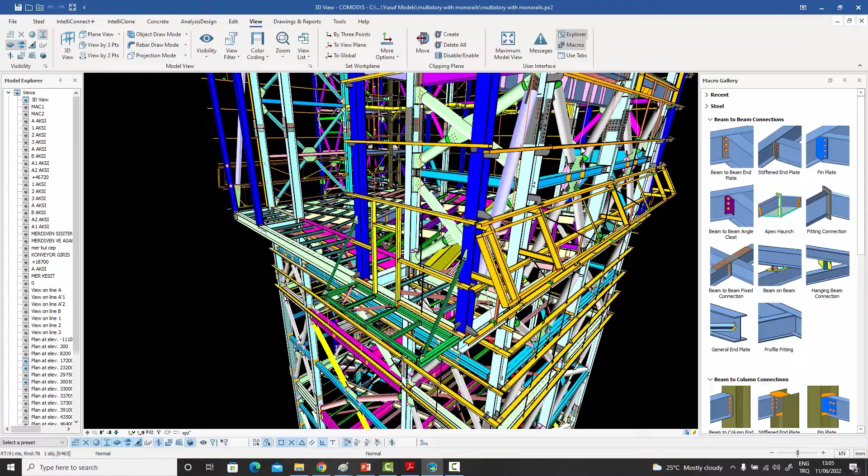In this video, I want to talk about general arrangement drawings.

In Comosys, or in 3D modeling programs in general, you have several different types of drawings. You have automatic drawings, like assembly drawings or part drawings. But you also have semi-automatic drawings, like general arrangement drawings. A general arrangement drawing basically tells you the location of the assemblies, and it's used during the erection of the structure.

To create these general arrangement drawings, after your model is complete and you're satisfied with it, and you want to create your plan views and section views in your drawings, you go to the Explorer on the left hand side, and at the bottom you have the drawing section. When you double click that, it takes you to the drawings manager side.

This is a different environment. The menus have all changed over here. There's an edit menu, a dimensioning menu, an annotation menu, a tables menu, a tools menu, etc. But right now we want to begin with how to create an empty drawing.

At the top of the left hand side, even this Explorer has changed. It's different from the Explorer on the modeling side. Over here you have the drawings manager at the top, and then you have modeling views, and over here you have all the views which you created on the modeling side. They're waiting for you on the drawing side as well. We have open drawings and model views, etc.

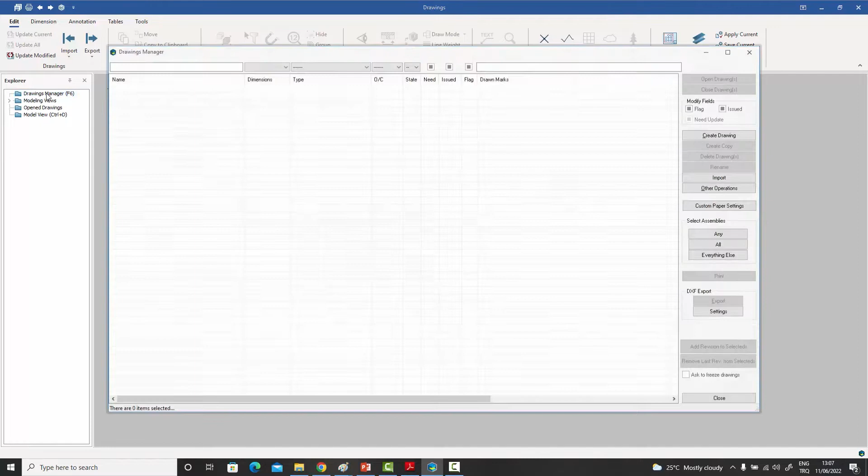But what we're going to be using primarily over here is the top option, which is drawings manager. If I double click that, this opens up, and I have this option of saying create a drawing. If I press that, it opens up the dialog box.

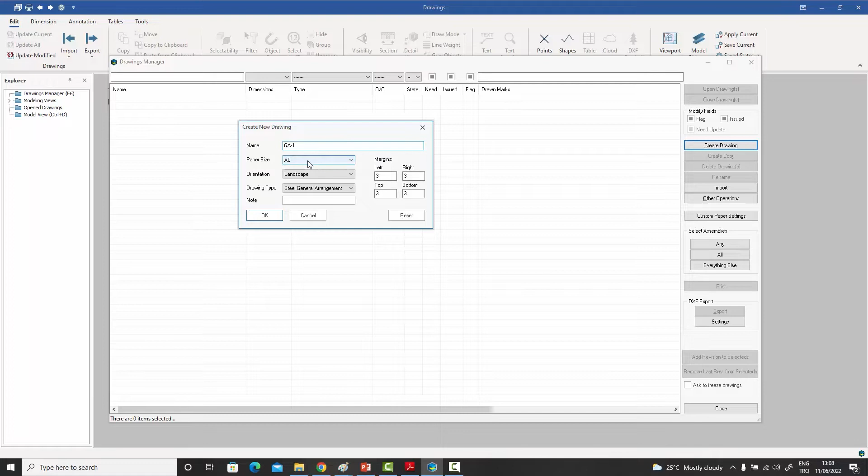I can give it a name, so let's say I call it GA1, general arrangement 1. You can choose a paper size, let's leave it at A0. You can choose an orientation, and you can give it a type - it can be a steel general arrangement drawing, a steel assembly drawing, single part - although these are created automatically, you can also create them manually. Multi-assemblies, grating drawings, there are different types. But let's say I want a steel general arrangement drawing, and these are the margins, and there can be some notes as well. So let's just press OK.

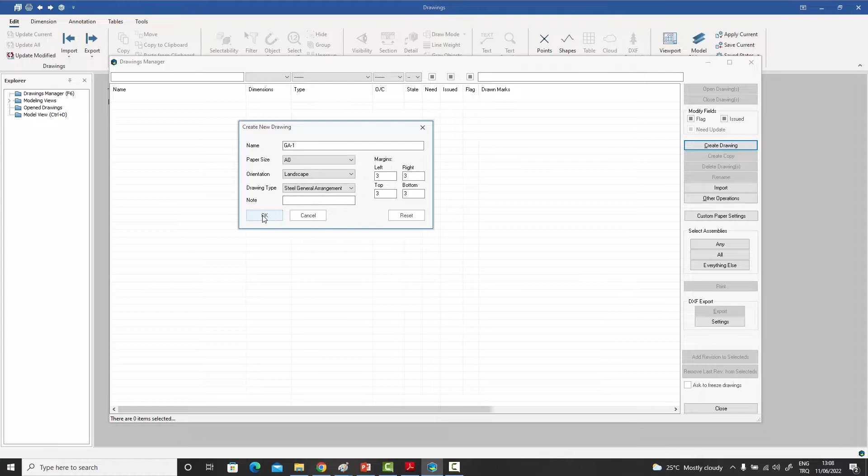When I do that, this drawing is created, and when I press this close button, it asks if I want to save the changes. Yes, I want to save this drawing immediately. If I zoom out a bit, you can see that this orange border is the outer border of the A0 drawing. Right now there's nothing in the drawing, and we'll talk about how we can import different stuff into this empty one.

Now, when we think of general arrangement drawings, what do we typically have in these drawings? The first thing we have are these viewports, these windows which are looking into the model. These are what we call viewports in Comosys. And inside this viewport, obviously, you have some steel or concrete, or a mixture of steel and concrete, or basically the structure, however you are looking at it.

Beyond that, there are dimensions, so the steel or concrete could be dimensioned - that's the second thing you have in these viewports. The third thing are these annotations, which are basically whatever fields you want to write on those members which you see on the screen. So there are three things: viewports, dimensions, and annotations. These are the primary big three of creating any general arrangement drawing.

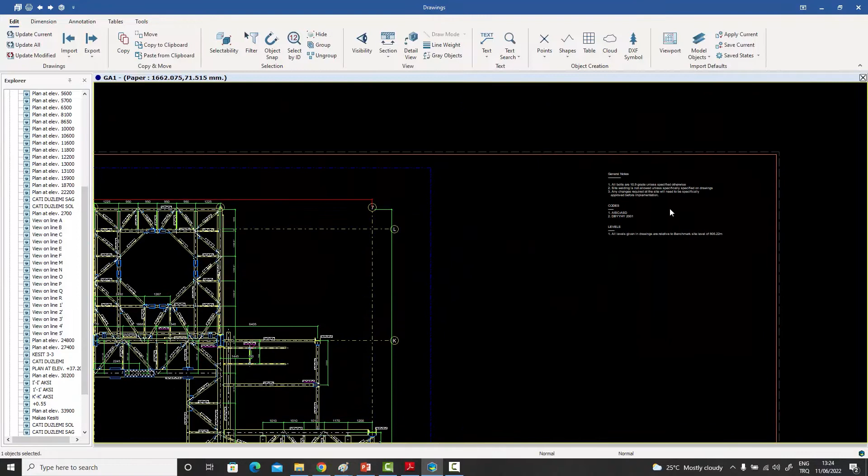And then obviously you have your title blocks, and you can have some notes if you want, and you can have other objects which you draw manually, or you can import a DXF file into it. But those I'm not really counting as my top priority right now.

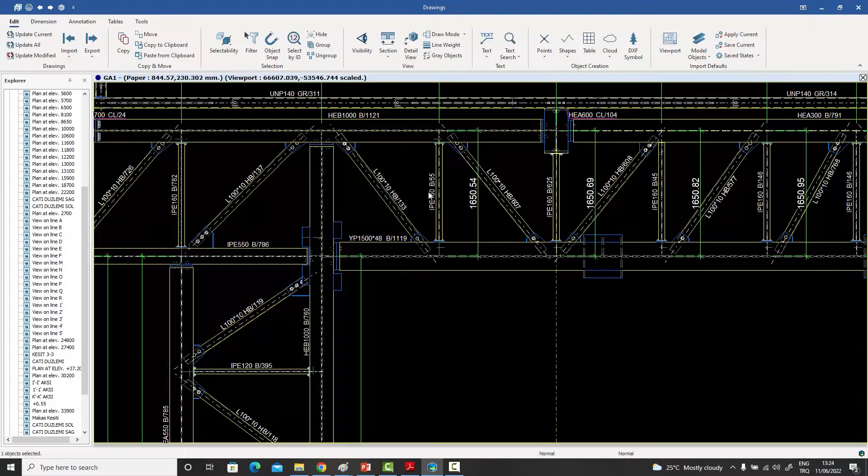95% of a GA drawing is basically the viewports, creating the dimensions, and creating these annotations. So that's what we will be talking about primarily in this little training session.

Now coming back to our empty drawing which we started off with, we're going to talk about how we put viewports inside this empty drawing. So we're on the drawing side. We came here, this is not the modeling side. The modeling side you can go back to by pressing this button over here. If you press that, you will go back to the modeling side. Then if you want to go back to the drawing side, you just need to double click on the drawings item over here again, and you get back to your drawings.

We've created this drawing, which we called GA1. If you remember, we gave it a size of A0, and we've got some basic fields in there. So this is an empty drawing right now, and the first thing we want to do is put a viewport inside it.

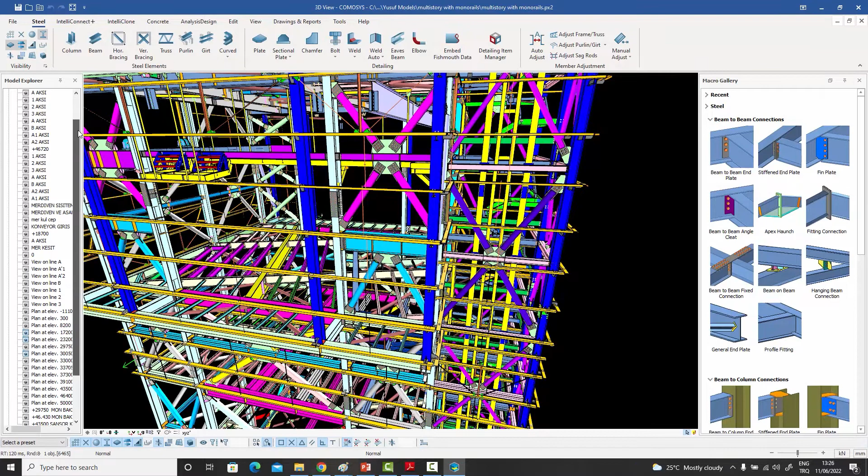Now if you remember, below this drawings manager, we have these modeling views, and over here you have all the views which you created in the model. These are basically the same - if I were to go back to the modeling side, you have these views over here. The same views which you have over there, you also have on the drawing side. So if I were to double click on the drawings one, the same views appear over here, and any one of them I can actually bring into my empty drawing.

So let's start off by saying I want to bring this plan at elevation 23,200 into my empty drawing. What I will do for that is go and click on this one, click on the plan at elevation 23,200, right click and say create a viewport. The moment I do so, a viewport will be created with whatever default settings you have, and we'll talk about those settings in a second.

So now that I have this viewport, what can I do with it? The first and most obvious thing, if I bring my mouse near the corners, you can see it changing the cursor. At the corners, I can resize it, so I can open it up a bit more if I wanted to. That's the first thing I can do with it.

The second thing I can do with it is if I go to the midpoints, I can actually move it around - I can move it around wherever I want inside the drawing. So these are the two basic things: you can move a viewport around, you can resize it.

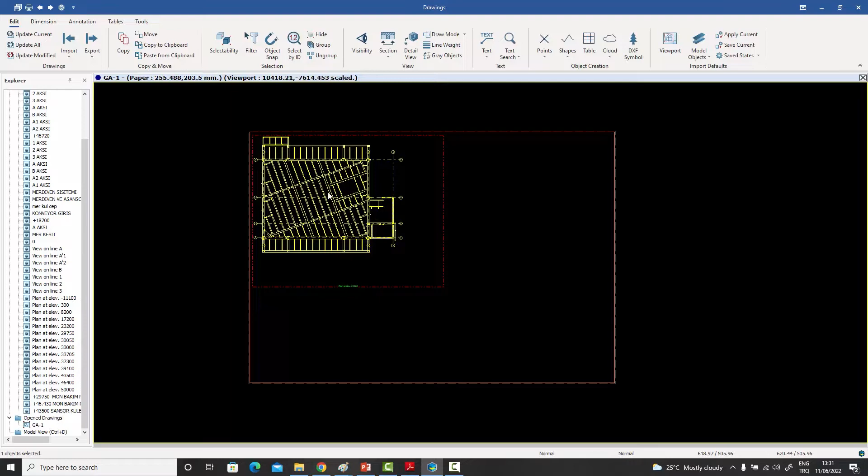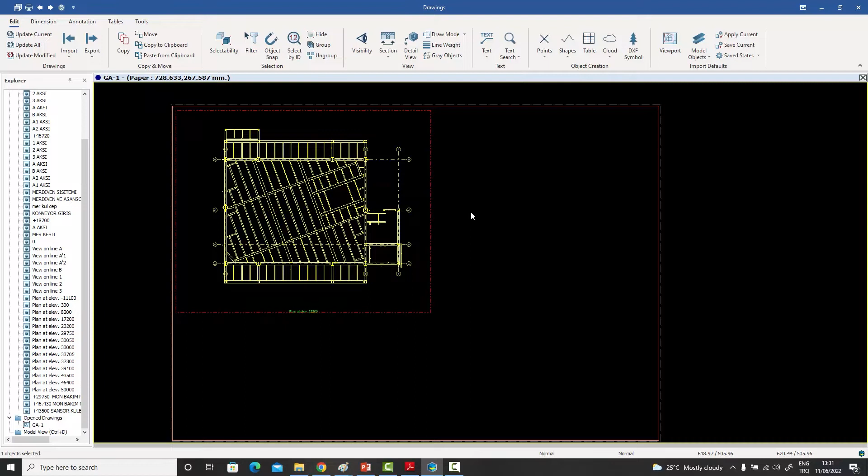Once you've resized it, you might want to relocate the stuff which is showing. Let's make it a bit bigger, and I want to relocate all of this into the center of this viewport. What you do for that is press the control key and press the middle mouse button, and you can move your structure around the viewport. That's a very convenient way, rather than going in and double clicking and entering a lot of dimensions in the X and Y directions - you basically move it exactly where you want, and you can just leave it like that. So this is a very convenient way of managing your viewport.

The next thing you can do with the viewport is double click anywhere inside the viewport, not on the members but where there's nothing, or you can double click this border as well. When you do that, the viewport property editor appears, and this has got several tab pages at the top which we'll go through because they're all important. On the general tab page, you can give the viewport a name, and by default it will automatically bring the name of the model view which you imported, but you can change that if you want - this is just the default you get.

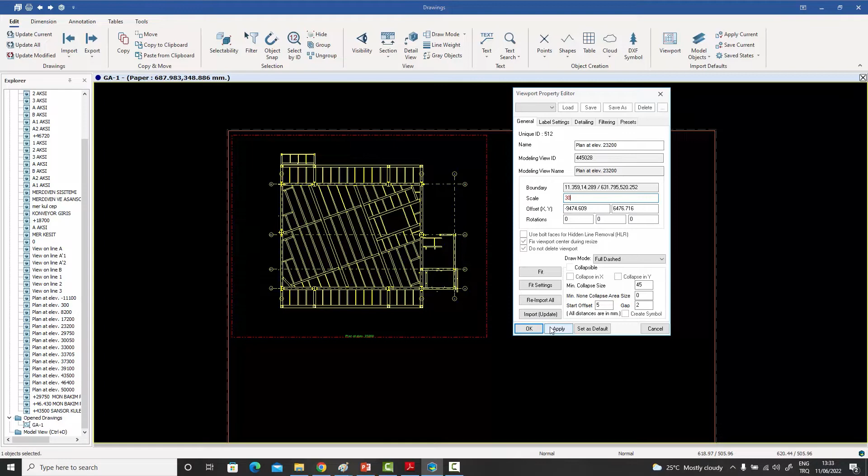The next thing of importance over here is the scale. So if I were to change this to say 30 and then press apply, the scale would be changed. The viewport would not be resized, but whatever is showing inside it would be rescaled. If I wanted to refit the viewport as well, I would just need to press this fit button, and when I do that it fits the boundaries of the viewport to fit the structure showing inside it.

We also have this option, which is very important: how do you want to actually draw this viewport? In Comosys, you have several options. You can draw it in line mode, where you basically see your structure in the form of lines. Sometimes when you're dealing with analysis related results, or you want to show joint numbers or profile numbers to corroborate with your analysis reports, you might want to display them as lines. So you have that option.

You can even go and change individual elements to lines as well, and I'll show that too. But there's a wireframe option, which is basically a non-hidden line view. If I were to zoom in, you can see - or maybe you can't see because this is already very nicely done - but if this was extending inside it, you would not see it as a hidden line view, you would see it as a non-hidden line view.

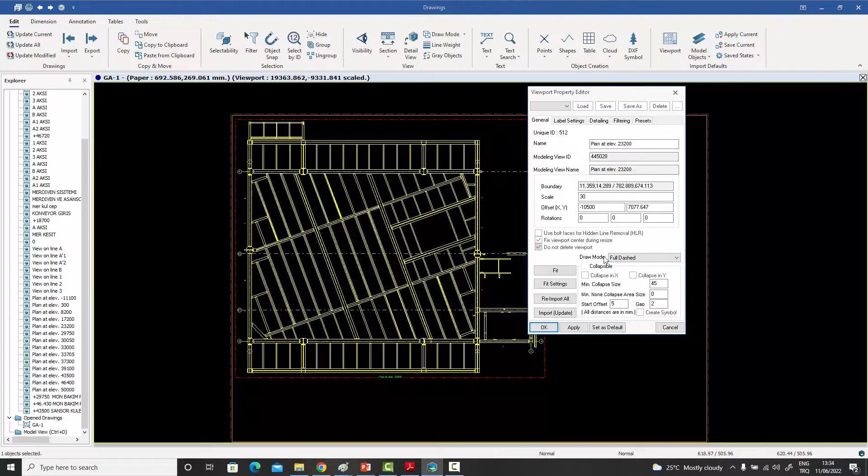But coming back, what you would normally use in a steel drawing would not be the wireframe one, you would use the full dashed. The hidden line means the hidden line check is done, and the full dashed one means that even if something is showing behind something, or its own hidden lines are behind something, they should also be shown. This is the one you would normally use in a steel general arrangement drawing, unless you're doing a 3D drawing. If you're doing a 3D view, you will use the normal hidden line view because you don't want too many hidden line things showing.

But the full dashed one is one you would normally do with plans and sections. So this is one I'm going to use, and you see that the moment I do that, my hidden lines are also shown. Now, let's see what else of importance we have over here.

There are some collapse related parameters. These are to do with assembly drawings. I'm not going to talk about them right now.

Okay, so I think these are the more important ones. If you want, you can change the rotation. So if it was a 3D view and you wanted to slightly modify the rotation, you could do that by modifying these three numbers over here. I think this is enough for the general tab for the moment.

The next thing I can do is move on to this label settings tab over here. This has to do with the label you see on the bottom of the viewport, which is basically the name you've given to the view. You can change it manually - it says plan at elevation 23,200.

You can place this label in different locations. If I were to choose this and say apply, it will go to the top. If I choose this one, it will go to the bottom right. I can put it in the bottom middle as well - basically all these six anchoring points.

Besides these anchoring points, I can give it a further offset. So if I were to give it an offset of say 25 millimeters, it would move it - these are millimeters in actual page size. I can give it an offset to the right, or an offset downward as well. So I've got some control over where I want to place that.

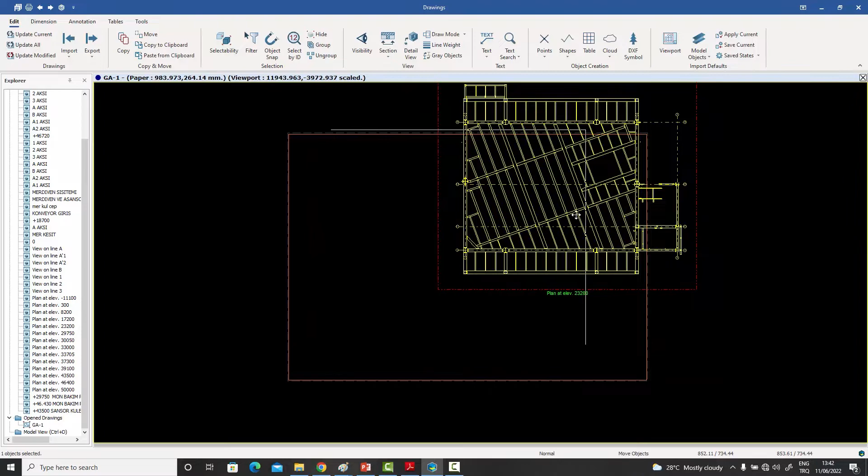Another thing I can do is locate it outside the viewport if I wanted to. If I press apply, it will be located outside the viewport, but it will still be attached to the viewport. So if I were to move the viewport around, the label will go with it - it's not that it gets detached. So I can use that option, locate it outside.

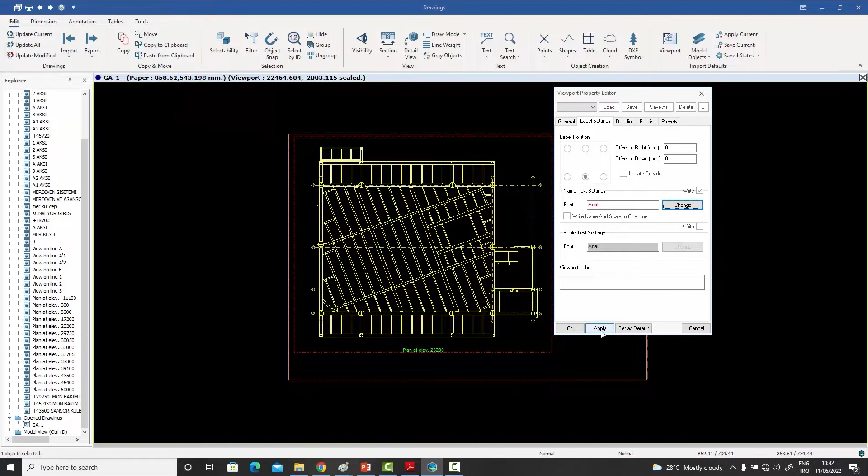I can obviously change the size of the font. If I were to bring it back in and say I want it bigger, let's say 25 millimeters high, I can change that. I can change the font, obviously, and I can give it a different label from over here. So these settings all have to do with this label which we have on our viewport.

The next tab is the detailing tab, but I'm going to go past that and go on to the filtering tab, which is more important. I'll come back to the detailing one.

In the filtering tab, you see these up-down limits. These are your classical up-down limits, which you also have on the modeling side for each view. You can change them, so I'm going to change them to 1 meter up and 1 meter down. The downside needs to be entered as minus. You also have minimum X and minimum Y, maximum X and maximum Y limits if you wanted to. If I press OK, you will see that some things will change.

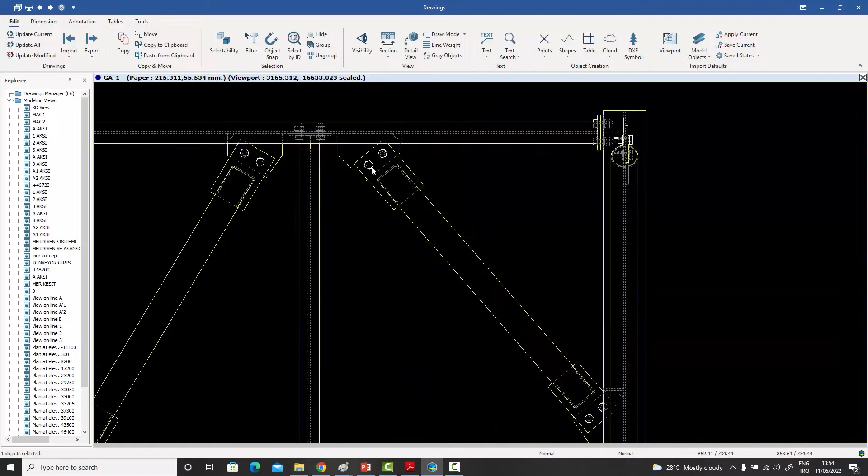There were certain elements in that floor which were not entering these up-down limits, and they've been added now. Also you see certain plates are showing which were not showing previously. So by modifying my up-down limits, I can get exactly the kind of depiction which I want, or include whichever members I want.

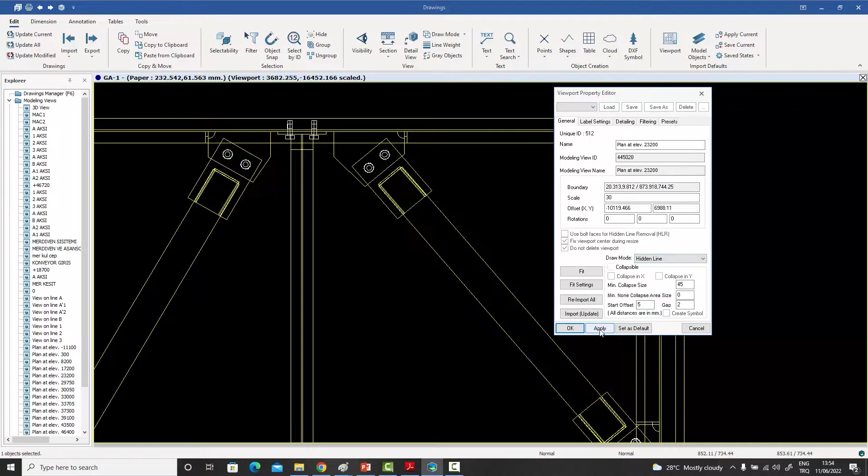Now, if you remember, I talked about this full dashed setting. This is the kind of result when you get the full dashed setting. If it was the wireframe setting, you would get a slightly different version with no hidden line mode. If it was just the hidden line one, we'd get something like this. And if it was the full dashed one, you'd get your proper steel GA type drawing.

So coming back to the topic at hand, let me double click on that one and go back to the filtering one. This plus 1000 minus 1000 is available to you, and you can modify these numbers according to your need.

Let's continue with the same filtering options. Over here we have this partial or full option, which tells the program whether you only want to include those elements which completely fall into these up-down or min x, min y, max x, max y limits, or also include those elements which partially lie within these limits.

For example, normally in a plan view you could see the columns. So if I were to close this and zoom in there, you can see the columns over there. Let me get a better column view. Here you can see the column, but this column is actually partially outside the limits of 1000 plus minus 1000.

And if you did not want to include this column in the view, you could go to the filtering and say full. If you did that, only those elements which completely lie inside the view would be shown, so this column would be filtered.

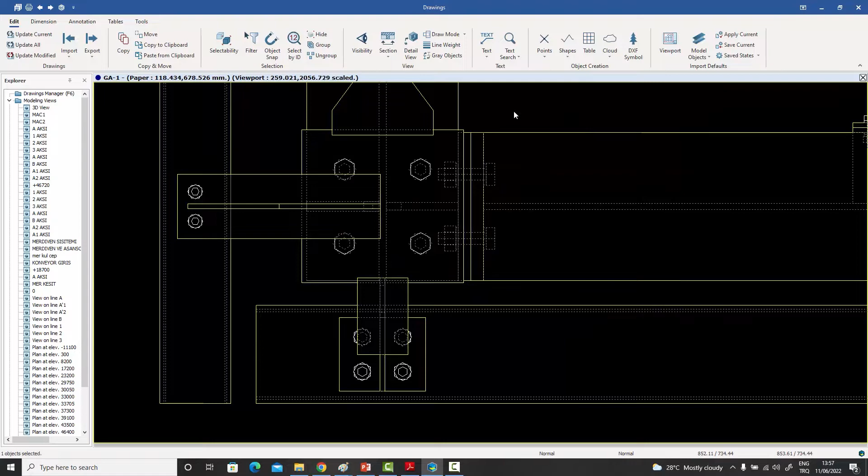Even the sag rod coming from the other direction, which is showing partially now, if I were to say OK, both of them will disappear from the screen, because now you have the full filtering option, in which only those elements completely lying in these up-down limits will be shown.

Normally you can leave it on as partial as well. Let's bring them back on, and we can continue with checking this option of filtering once again.

Now, so you understood these - this is partial, full, pretty easy to understand. And this is the next most important one, which is the actual filter settings for this view.

Within these up-down limits, you still have all your objects, but you can further filter which particular objects you want to show. If I press the filter settings and go to my filter, it has many options, from general to object types to groups to profiles to plates to solids to macros, rebars, analysis and design related filters, user defined attributes. So for example, I have object types.

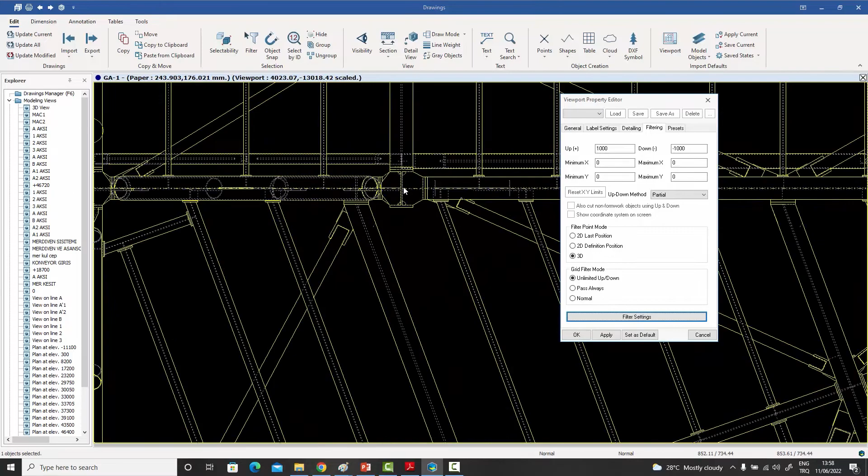I can say that I don't want to see the bolts. If I turn off the bolts and say okay, you can see that the bolts have disappeared from the screen - you no longer see the bolts. If I were to go in there and turn on the bolts again and say okay, now the bolts are visible in your view.

So these filtering options, if I were to go back in there, let's see what we have. The first control you have is the object types, in which you can choose whether you want to see the grid, the profiles, the dimensions, the joints, the construction lines, the construction circles. These are coming from the model, if you remember. Rebars, any cuts you might want to see.

You might be wondering, why would I want to see cuts? But in concrete drawings, you can actually annotate your cuts, and we'll talk about them later.

Do you want to import the welds, external drawing objects, super shells, density lines? So all the objects which basically exist in the modeling side, you can decide whether you want to include them in your drawing or not. And in steel drawings, obviously, you will not want to include super shells and stuff like that.

So you decide which objects you want. Then you have your grouping options, and you can create as many groups on the modeling side, and those groups can be filtered over here. You can choose which particular profiles you want. So you might want to say that I only want to see the beams and not the columns and the horizontal braces and the vertical braces.

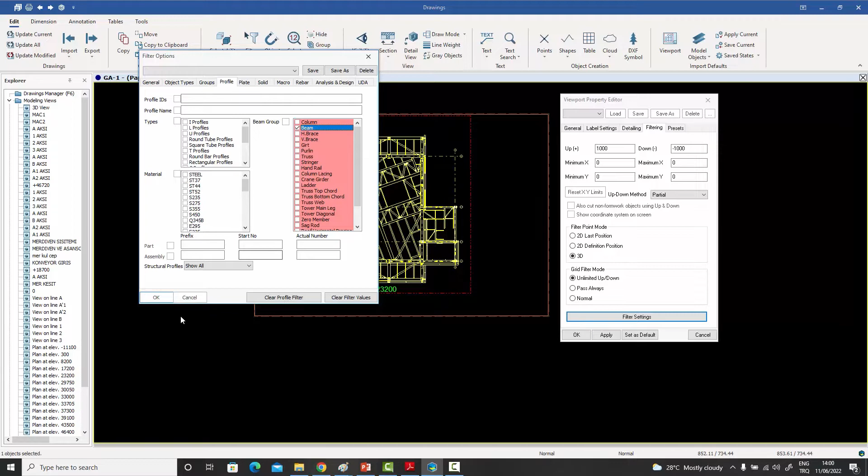And if you do that and press OK, then only the beams will be filtered out, and all the other columns and horizontal braces will be gone.

Similarly, you can say I want the beams and the horizontal braces, and this time they will be shown. Or what you can also do is you can say I want the beams and the horizontal. I don't want the beams and everything else besides those.

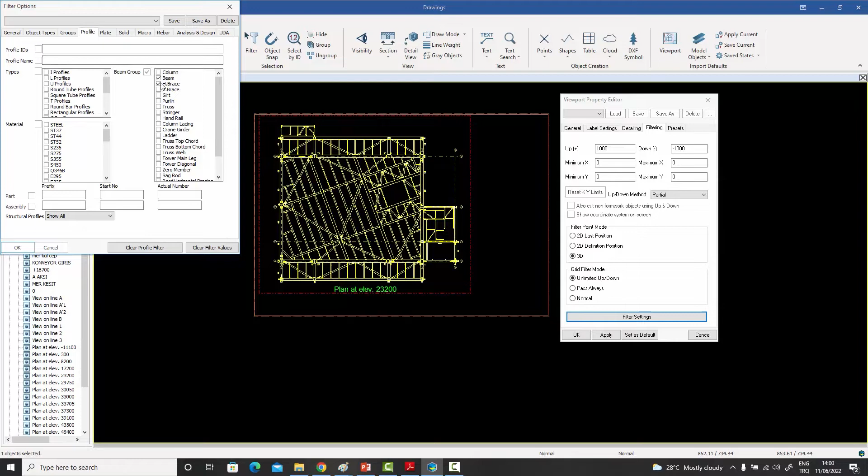So this is a not filter in a way. So if I say this would mean don't show me the beams and the horizontal braces. And if I were to press OK on that, basically most of the structure will disappear.

So these are very powerful filtering options for choosing by beam groups. You can choose by profile types. If you want I profiles, angles, channels, round tubes, square hollow sections, T profiles, whatever the profile types we have in Comosys, you can choose by that.

You can choose by material. You can choose by assembly numbers if you only wanted to see assemblies with certain prefixes or some actual assembly numbers. You can choose that. You can select particular profile IDs or profile names. So you can say I only want to see the IPE 300s, if you will.

This grouping option is unique because you can create arbitrary groups on the modeling side, and you can just select anything, and they may not be following any pattern, and you can put them in a group, and over here you might ask the program to filter that group out for you.

Let's bring them back on. And if I were to go back in and see, if we talked about the profiles, for the plates, you can talk about their usages and their types and their plate IDs. For the solids, you have a lot of different options. I don't want to go into the details of all these filtering options.

You can decide which particular macro you want to import as well. For rebars, you can have the types of rebars and their parent types, certain diameters you want to include or not include. So there are a lot of actions, a lot of filtering options which you have over here.

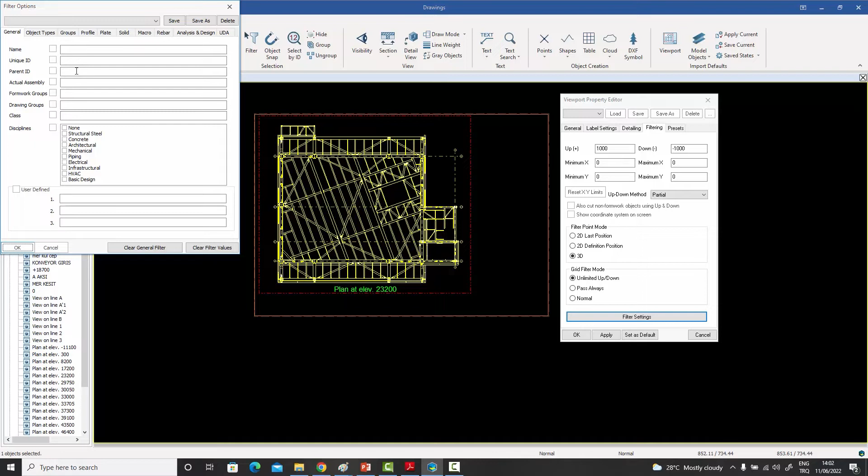In the general tab, you have your unique IDs which you can use. You can have actual assembly numbers generally over here. They could be applying to plates or profiles or anything else. You have formwork groups, you have classes, you have disciplines. So there's a lot of filtering options, and you can save these away with different names.

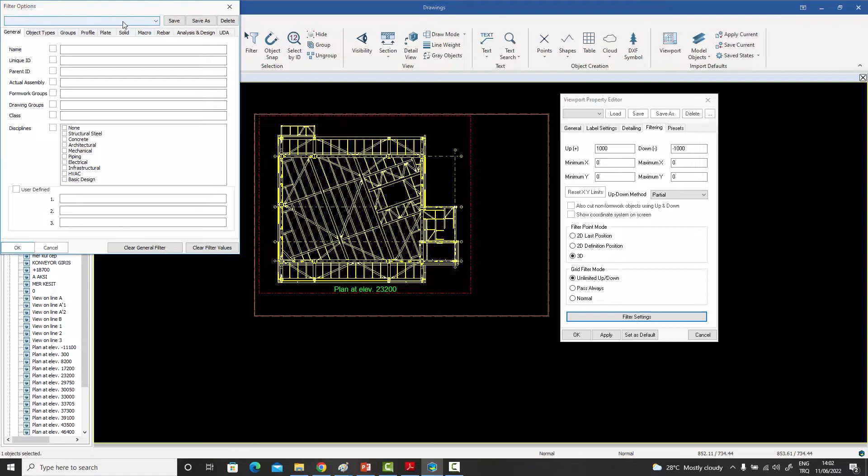What you can do in Comosys in general, like we've discussed elsewhere as well, is every dialog box you see in Comosys will have a preset. And you can save away these presets and recall them and just load them, and they will help you getting your filtering done very, very quickly.

Now let's continue with the detailing tab, which I had missed, and I'd gone on to the filtering tab. So in the detailing tab, we have certain things which are useful. Regarding the bolt imports, we can import the bolts as bolts only, or as holes only, or as all. So sometimes you don't want to show the bolts, but you still want to show the holes. So then you can change the style from here.

And then it has the option of certain drawing styles for the bolts. You can draw the bolts the default way, or as simple lines, etc.

Similarly, for the rebars, we have different import styles. We have the 3D fast, which is basically a faster algorithm for the 3D hidden lines, and also a 2D import, in which case the rebar will be imported as a 2D line, but the line will have the thickness of the diameter of the rebar. So it will look thick enough, as thick as the rebar diameter is, but in reality it will be a 2D import, which is what you normally do in your 2D rebar drawings.

Now, these are options I want to show elsewhere. These are to do with rebar staggering, because I don't have a rebar example over here. But this is something I want to show, which is the crop model objects option.

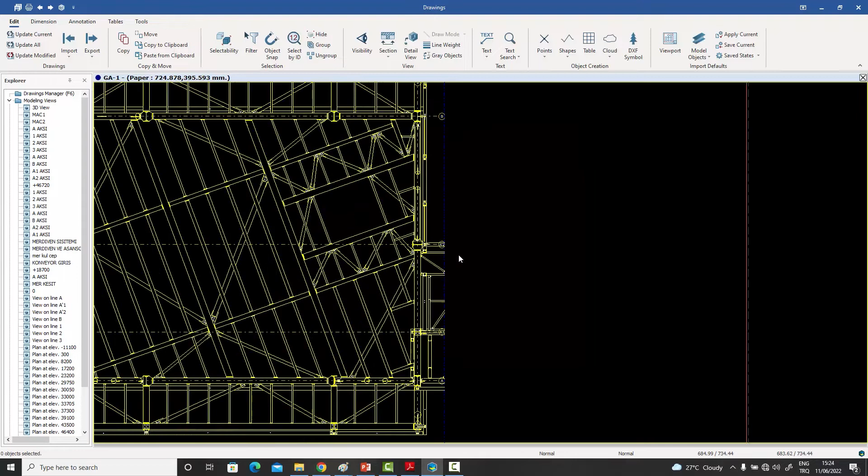For example, if I have this viewport over here and I want to pull this back in a bit so I don't see beyond this point, I can do that like this, and that's very easy. But what if I actually wanted to cut the members off? I don't want to pull the viewport back in. I want the viewport to be over there, but I don't want to show elements beyond this point. I want to crop while keeping the viewport.

The reason for that could be that maybe I want to write something over here and show something that is not a model object. So I don't want to use the option of squeezing the window limits inside. I want to keep them where they are, and yet I want a vertical cropping line on the right, or the top, or the left, or the right.

So what I can do is, if I double click and go to the detailing menu, and say crop model objects, and enter 200, for example, in millimeters, the program will crop the model while keeping the viewport where it is. So it's like creating a viewport within a viewport. And when I do that, you can see this gray viewport has been created within the blue viewport.

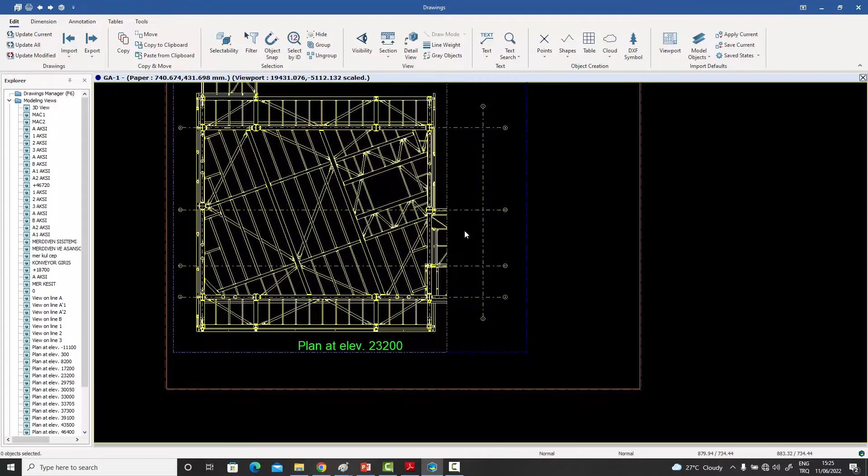And what that allows me now is to do certain things, like creating a zigzag line over here. So I can snap somewhere over here, go down somewhere over here, and do that, like that. Let me do it again, like that. Yeah, and I create this symbol, which is basically telling the program that I have cut it off from here.

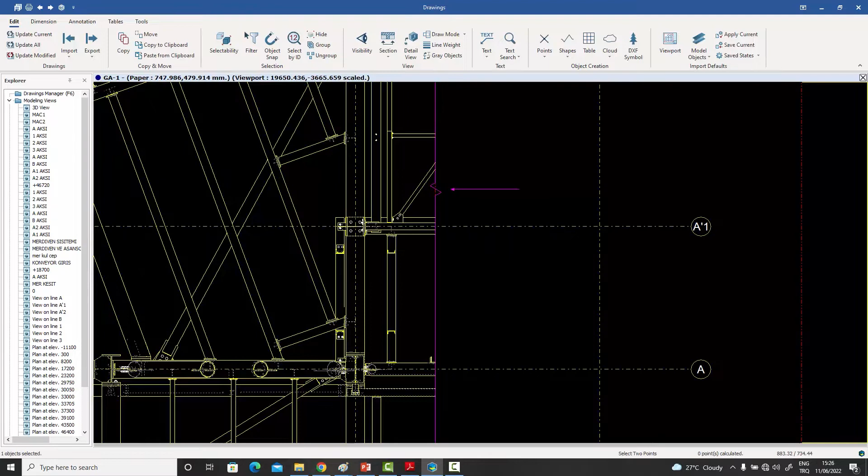After that, I can go in and create a text, maybe somewhere over here, a horizontal line, and write something like whatever. I can say equipment limits, for example, and I have this option.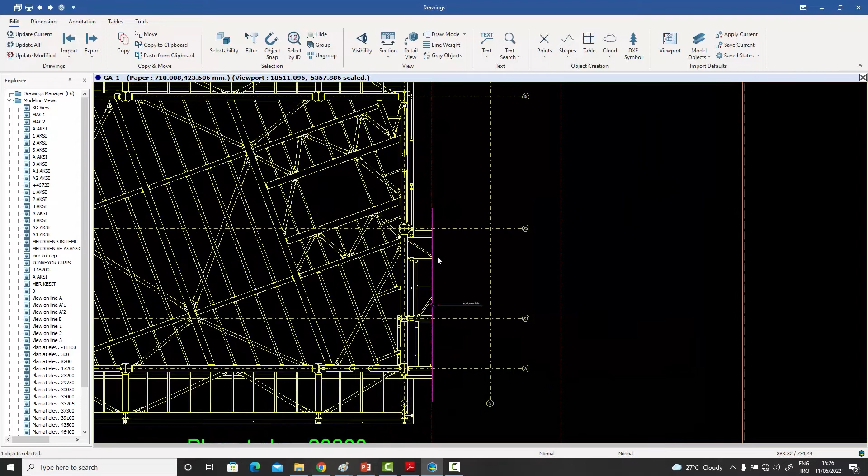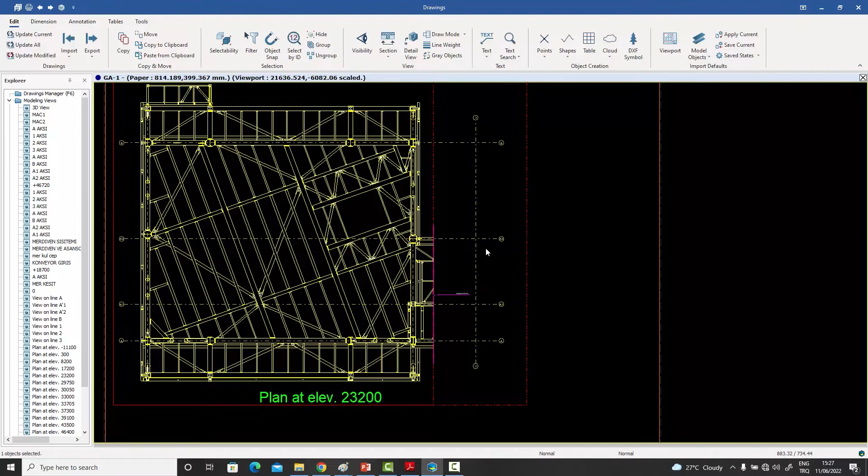So if I had pulled the viewport back in, that wouldn't have worked. I want the viewport to stay where it is and yet cut off the model objects at a certain point, and I can do that from the right side, from the bottom, from the left, or from the top, the moment I choose this cropping option. This is quite useful because in drawings, very often you want to draw or write something, but you don't want model elements showing, and since your viewport is bigger than that, they do show, and you don't have an option of cropping them off. So this is very useful, and you can use it wherever required.

Now that we are done with the viewports and the various tabs for the viewports, let's move on to what is inside the viewport, which is whatever objects we filter. If I go back to the filtering options and check the objects, we can import grids, profiles, joints, construction lines, construction circles. But more often than not, if you're dealing with steel general arrangement drawings, you'll be importing grids, profiles, plates, groups, and if it's concrete, you might be importing rebars as well, and sometimes solids too, depending on the need.

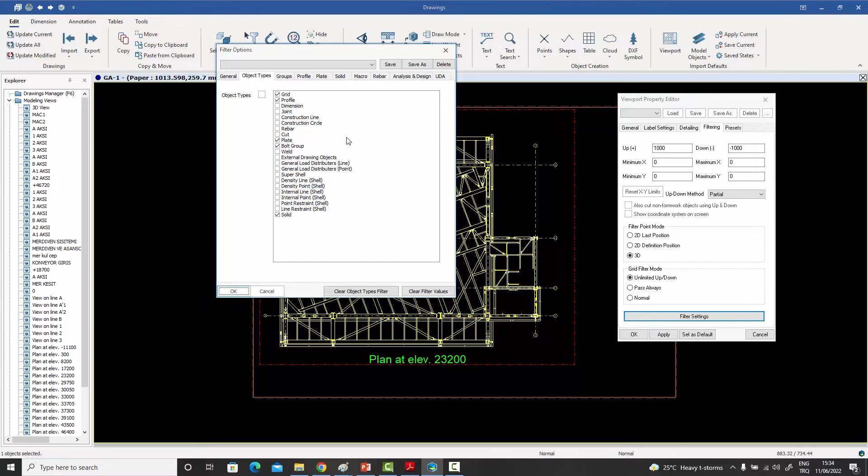So these are the objects which you'll be having in your viewport usually. For example, over here in our viewport we have frames. So these are the frames.

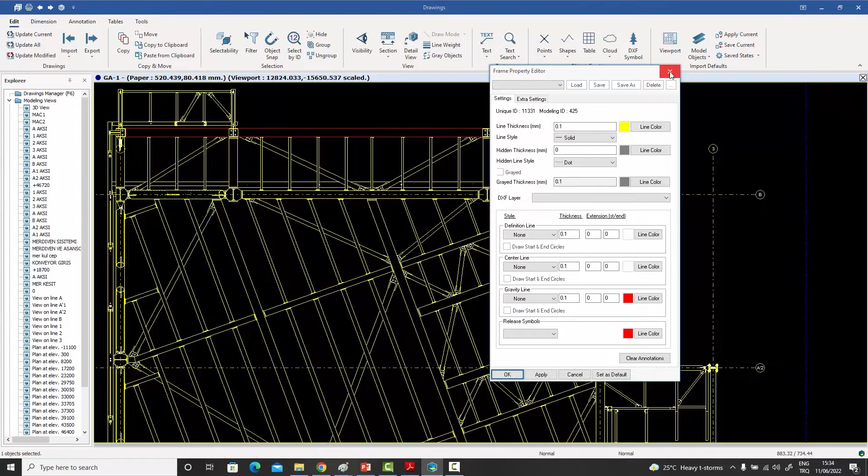If I double click on any one of the frames, we can see that each one has a property editor. So this is the frame property editor. If I zoom in and double click on this plate, there's a plate property editor, which is different from the frame property editor. Similarly, if I select these bolts and double click on one, there's a bolt property editor as well.

So the first thing you need to know is that when you have all these different objects, if I do a multiple selection and wanted to select only the frames, I couldn't do that because we have a mixture of objects in there. Let's say I wanted to modify a particular property of the frames - that would not be possible.

But with Comosys, since we have this on-the-fly filtering, if I just select like that and press enter, it immediately tells me what I have selected. So it's telling me that you've selected 352 profiles, 1,714 plates, so many bolts, and some drawing objects. Whatever is not selected is grayed out.

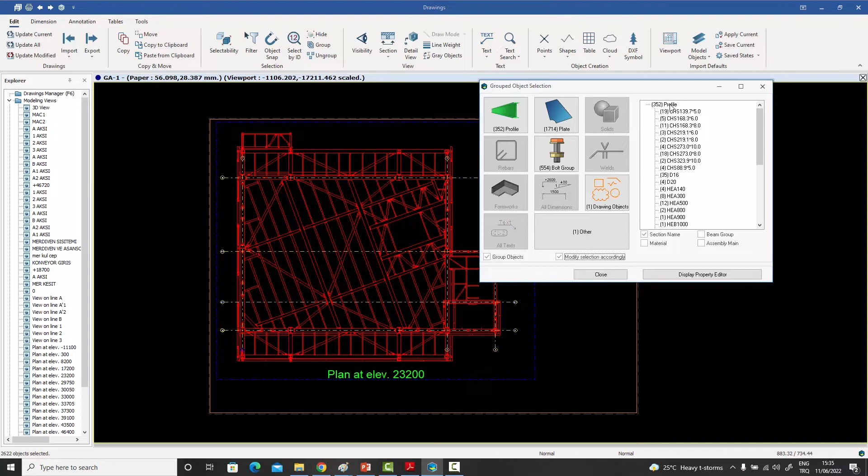So let's say I wanted to select only the frames. If I selected the profiles over here, then on the right hand side, all my profiles - if I just double clicked on this top line, I could select all the frames in one go. So let's do that. Let's double click on this one.

Now what it's done is it has removed the plates and the bolts from the selection. As you can see in the background, they have been removed, and only the frames are selected. It has also opened the property editor of the frame so that I can make any modifications. So let's try doing that.

The first thing we can talk about in this dialog box is the line thicknesses. As you can see, there are two line thicknesses - one is the normal line thickness, which you see over here, and one is the hidden line thickness. So every object in Comosys on the drawing side will have two line thicknesses, one for the normal line and one for the hidden line. And there will be a line style, and another line style for the hidden lines.

Normally in steel, for the normal lines you have a solid line style, with a line thickness of say 0.3 millimeters. For your hidden lines you might have 0.1 millimeters - actually even if you have 0 in there, it's still going to create a very, very thin line. But let's say we want a line thickness of 0.1 millimeters for the hidden lines, and for the hidden lines I want a line style of dash - this is the line style I want for hidden lines. My color can be yellow, for example, and for the hidden lines it's gray. If I apply that, those settings will be applied over there.

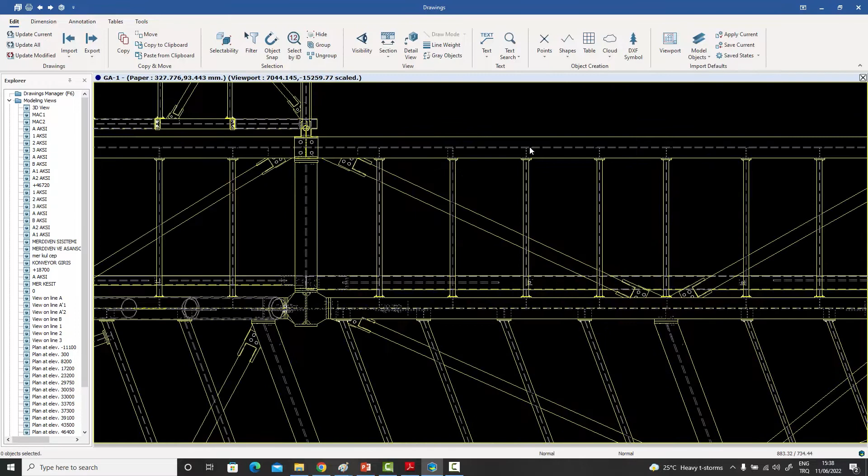Then you have things like definition line, center line, and gravity line, which you can turn on and off. First let's close this and zoom in and see that now we have these hidden lines - previously there were dots, but now we have them in the form of dashed lines for the frames. But if you see, the center lines are not being drawn.

So the center line of this I-beam, which is over here, is not being drawn. The center line of this one is not being drawn. So for that, let's go back in - let's select everything, press enter, press my frames, and double click on the profiles so that the property editor is open. If I go over there and say definition line, I've got the options of definition line, center line, and gravity line.

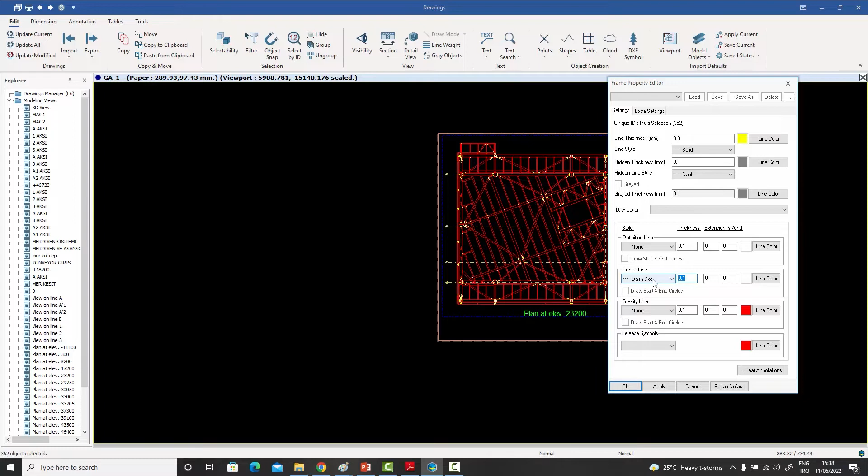So let's turn on the center line definition and call it a dotted line or dash dot line, for example, depending on what we want. This is an offset, which we can give it—let's give it an offset of say 3 millimeters, and see what it turns out to be. Press OK, and when I zoom back in, you can see the center line has been drawn.

It wasn't previously there. But what I don't like—if I double click on that, I want to extend. I think this is the one, yeah this is the extension, this is the thickness. Actually I did it wrong, let me put it back at 0.1.

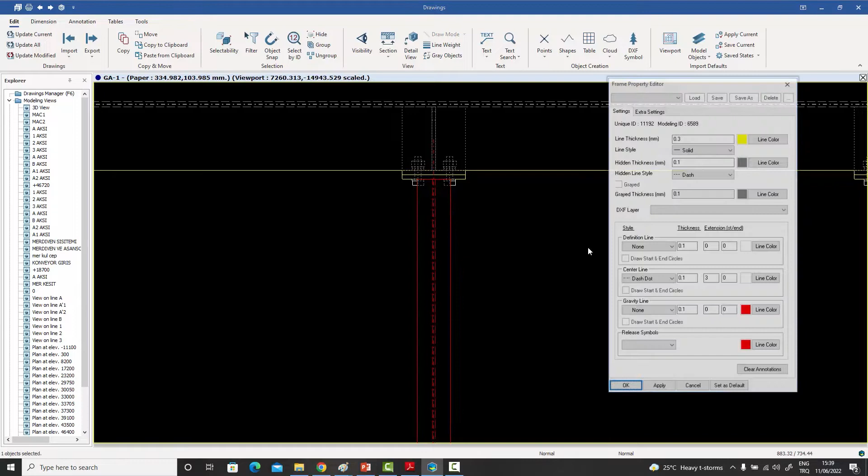Let's do an extension of 3 millimeters. Yes, so even 3 is not enough, so maybe I want about 6 millimeters—that's probably a better number. Yeah, that looks like a reasonable number in general.

So let me go back in there, select everything, do the on-the-fly filtering, go in there, convert this back to 0.1, which was a mistake, and convert all these into say 7 millimeters, and say OK.

And when I do that now, all my center lines have been extended, as you can see over there. And now you can even snap to the points, to the intersection points of these center lines.

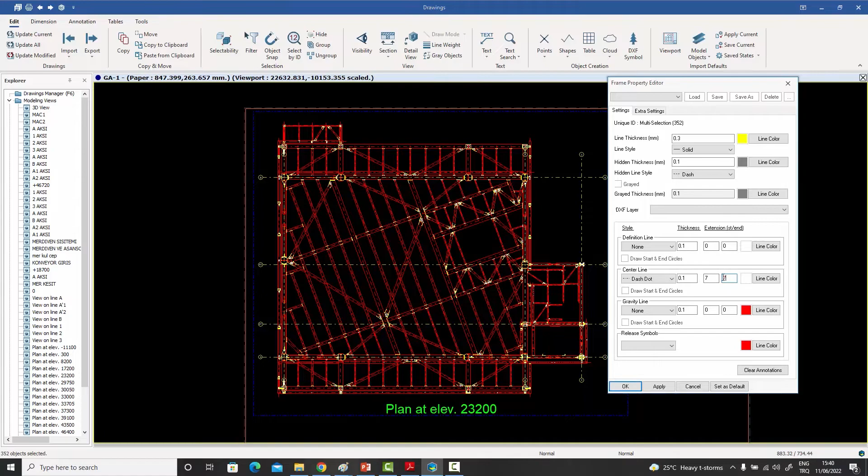Now obviously you will not only give the extension line to the start, but you'll also give it to the end, because you want the extension line to extend on both sides. When you do that, all the lines will be extended, as you can see over here. Every beam will have a start and an end extension, and you can now snap to these intersections as well.

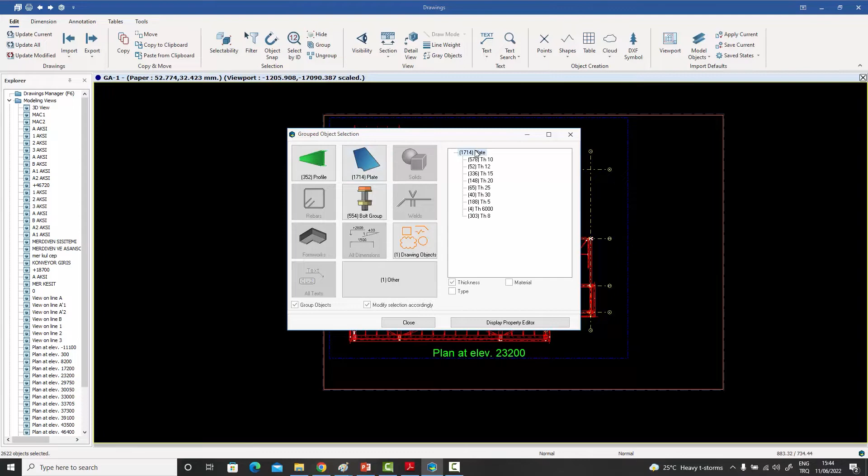You can do the same thing for the plates as well. If I press enter and select the plates only, I can go into my plate editor and give it a line thickness for the main and a line thickness for the hidden line. Line types, these need to be dashed. You can apply them and set them as default.

You want to choose a different color for the plates, for example—you might want them to be blue. Let's do that and set them as default. Also, you have these other options which you can easily use for your grouping. Now if I zoom in, you will see that the plates have turned—all plates have been turned blue.

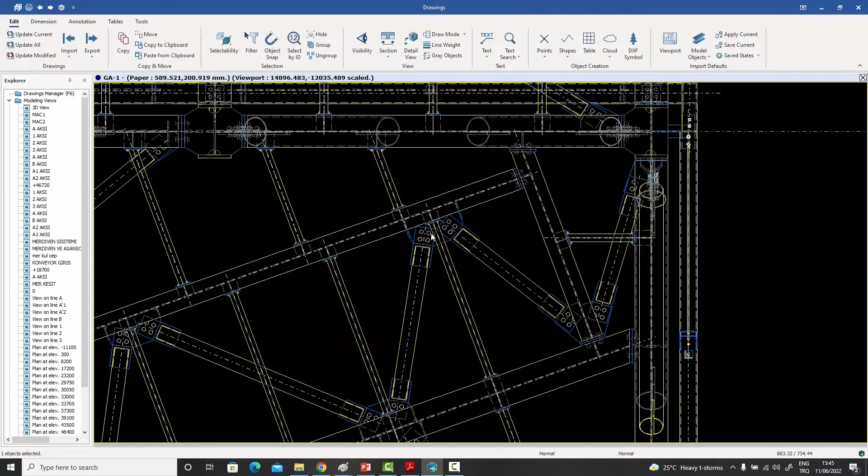You can do the same for the bolts as well. If I select everything, press enter, this time select the bolts—select all. I can select a particular diameter through on-the-fly filtering, but I can even choose a different color. Let's say green color for my bolts, for example. And when I zoom in, the bolts will be of that color.

So this is a very easy way of changing these parameters for whatever it is that you have imported into your viewport. If you really wanted, you could even select by beam groups, for example.

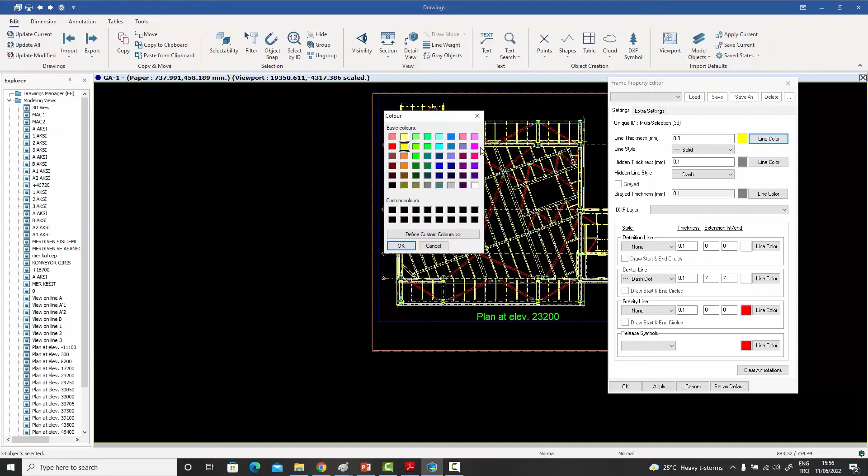So if I went into my profiles and grouped them according to the beam group, I could say I only want the horizontal braces to be selected, and now only the horizontal braces have been selected, as you can see. And maybe I can change their line color to something—maybe this color. Then I can see them in a different color. So you have those kinds of filtering options easily available.

What you can even do is change their draw styles if you wanted to. So let me go back in, press enter, go to the profiles, and once again select them according to the beam group—go to the horizontal braces. And this time what I can do is actually remove all their lines, main and dashed, completely, and only draw their center lines as a solid line, for example.

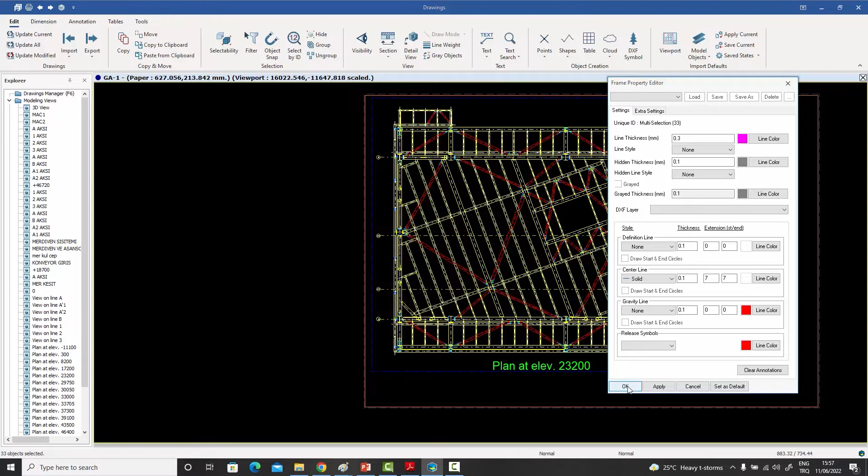In that case, I can decide to show the horizontal bracings only as lines, whereas everything else has been drawn properly according to the full profile section. So all these things are possible with this on-the-fly filtering and choosing different elements to be drawn differently.

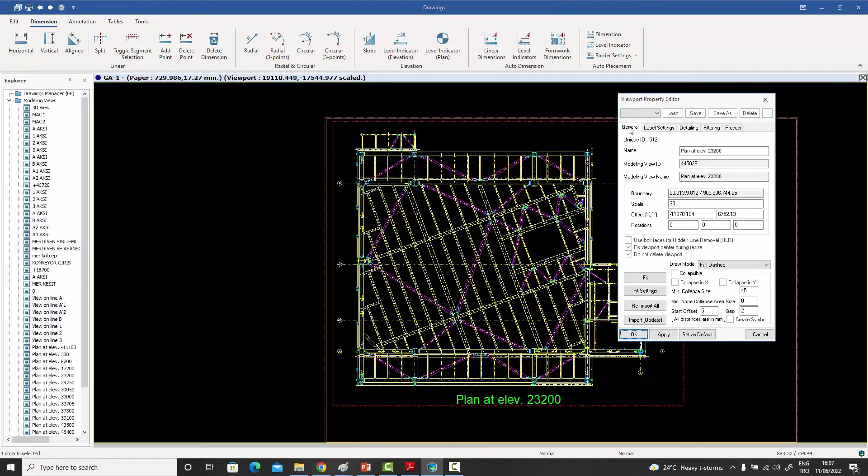Now we've basically covered all the aspects of importing a viewport from the model into the drawing, and then changing the various properties of the viewport by going through all these settings - the label settings, detailing settings, filtering settings, general settings, etc. We've also talked about changing individual parameters of the objects imported into that viewport by changing their line thicknesses, definition lines, colors, etc. All of these are useful and required if you want to create a proper drawing.

Now, once we are happy with our viewports, like we discussed in the beginning, that in a drawing typically the most important things you do are creating viewports, adding dimensions, and then adding annotations. So we've talked about creating viewports in some detail. Now let's talk about creating dimensions.

In the dimensions tab, if you go to the dimensions menu, you've got lots of options for dimensioning. Most of them are for manual dimensioning, and some have to do with automatic dimensioning as well. Starting from the left, we have horizontal dimensions, vertical dimensions, and aligned dimensions. For example, all the dimensions over here will be horizontal, all the dimensions along this line will be vertical, and if we were to dimension this beam along this beam, that would be an aligned dimension.

So what you do is click on the horizontal one, and it asks for points. Let's zoom in and select this point, and the second one can be this point, and then it asks for a place where you want the dimension to be released. Wherever you right click, the dimension will be created.

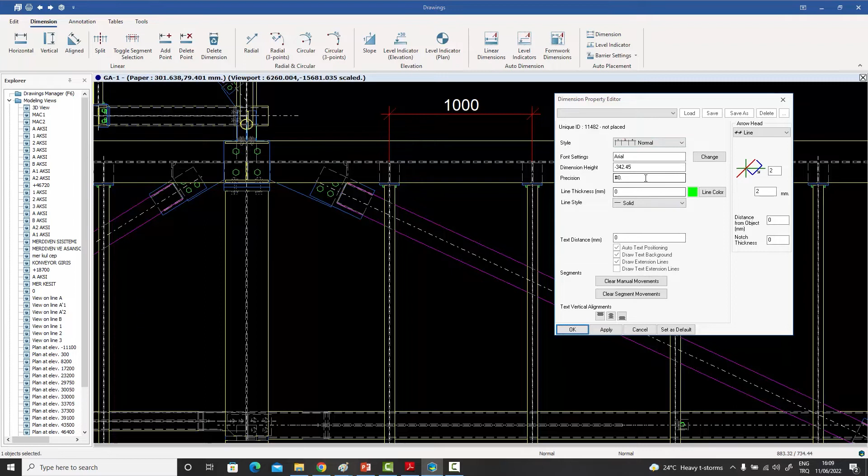If I double click on this one, I can open the dimension property editor, and I can see it has certain options which we can talk about. We have certain options for the arrowhead - different styles for the arrowhead - and we'll come back to this.

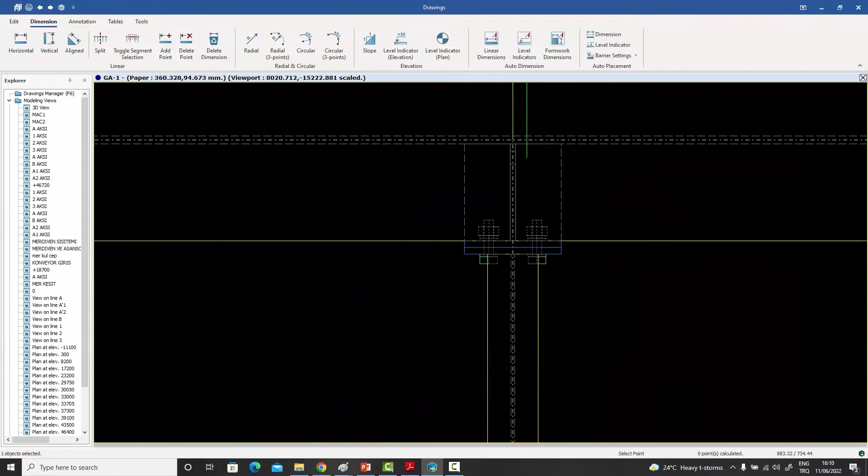But what I want to show you right now is if I right click this and say add point, it can continue the dimension. So if I zoom in and add this point as well, I can pan while doing that and add this point. I can pan, zoom in, and select this one, pan again, zoom in, and select this one. Whenever I right click I'll get out of the command.

As I do that, my dimensions are being created. It's very easy - you select an option, select the points you want to snap to, and whenever you're done, you just right click and finish. If you want to add points, you select the dimension and say add point or delete point.

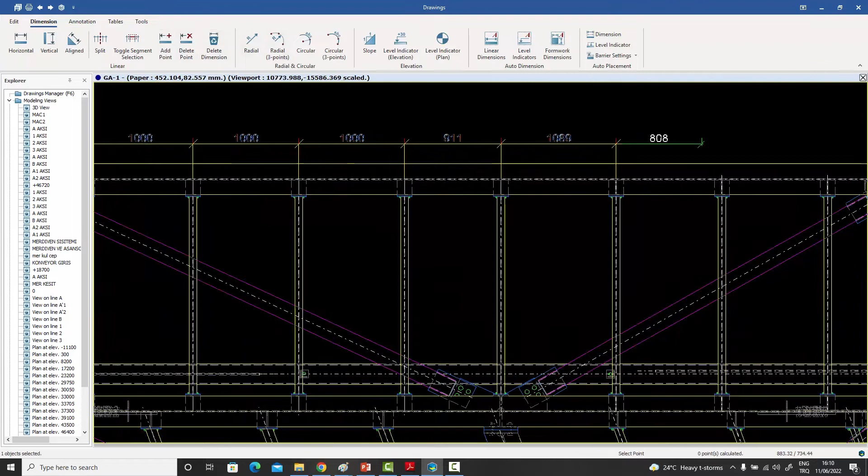These options are also available over here - add point and delete point. If you select this one and press add point, you can go in and select this one and right click, and you would have added your point. Similarly, for the delete point option, if I choose it, you can click anywhere on these lines and that particular dimension will be removed from the list.

That's very easy. If I double click on the dimension again, the options are there for different styles - this is the normal style. If I do the absolute one, it will start giving absolute dimensions rather than relative ones. So it's 1000, 2000, 3000. This one is 5000, 6000. Similarly, I can give absolute and relative together if I want.

In that case, it will be 1000, this will be the total. Another 1000, total is 2000. Another 1000, total is 3000, etc. So those options are available. You have control over your accuracy, so you can increase or decrease the precision with which you want your dimensions to be shown. Now, what other options?

Like I said, you have options of various line styles - you can have a line, a thick line, arrowheads, filled arrows, and you have control over their angle. So you can maybe reduce the angle of the arrows over there. You have control over the size of those arrowheads, etc.

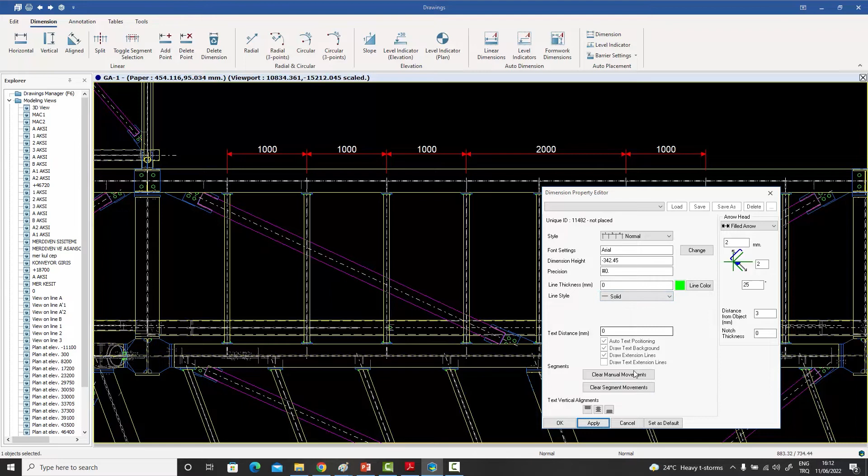So what I want to show you is this: normally if I select this dimension, I can move it up and down, and the whole dimension moves together.

But if I press this toggle segment option, I can actually select individual elements and move this one up separately, at a different location, and move another one up like that. Once I remove the toggle segment selection, the whole dimension is still together.

I can still move them up and down together like that, but by using the toggle option, I've managed to separate parts of them, because sometimes you have certain things clashing along that line, and you don't want to move the entire line up, only a particular one.

So you can use this toggle segment option, and if you wanted to bring it back to the original, all you need to do is double click on that, say clear your segment movements, say okay, and all your segment movements will be reset.

Now the vertical dimensions are going to be done the same way as the horizontal ones. Let me quickly do one aligned one over here. Zoom in, snap to this point, snap to this point, right click and create my dimension. Right click that, add a point to it, zoom in there, add a point, add another point. Basically, the idea is that you just keep selecting points, and depending on which type you've chosen, whether horizontal, vertical, or aligned, you'll get results according to that.

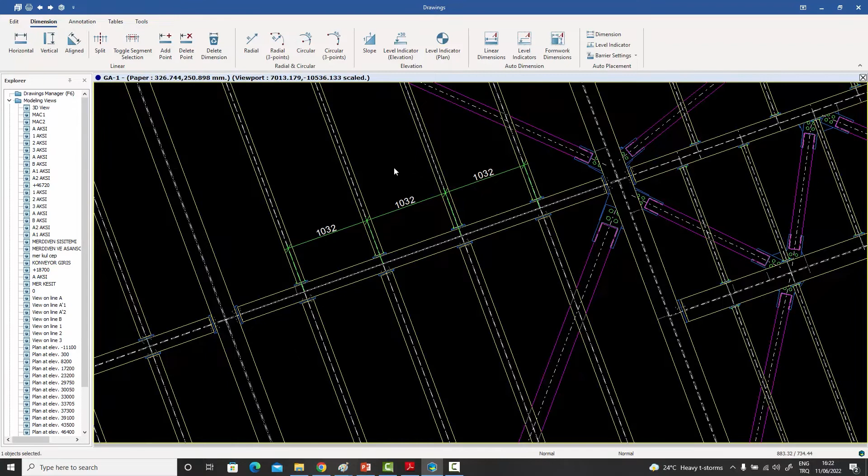I'm not going to go through every one of these commands, they're pretty self-evident, but you can create slopes. For example, if I wanted a slope dimension, this would more often be used in concrete, but let's say I wanted to give the slope of this line, I could just select two points on it and a slope dimension would be created.

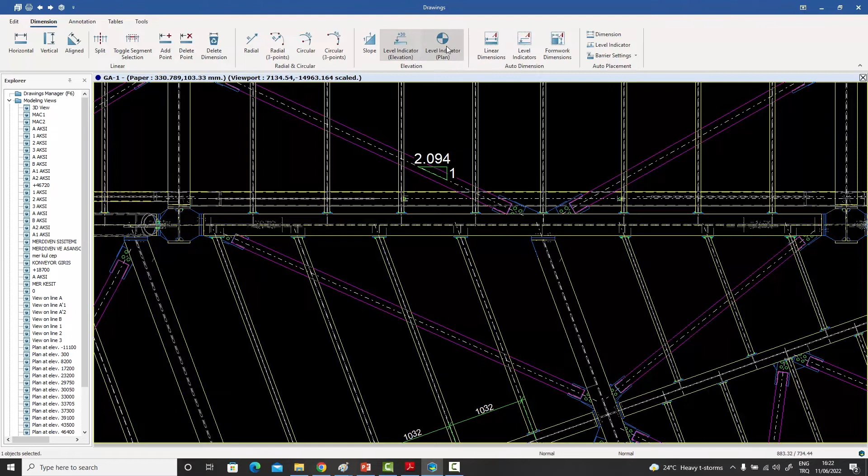If I wanted to give a level indicator, this being a plan view, that's more appropriate. All you need to do is select a particular point, and it'll pick up the level from the model. After that, you can place it anywhere on the drawing, and you'll have created your level indicator for this plan view.

Now in this video I'm trying to give training for manually creating dimensions, but we've discussed elsewhere that for steel GA drawings we have the option of creating dimensions automatically as well. So let me briefly go over that.

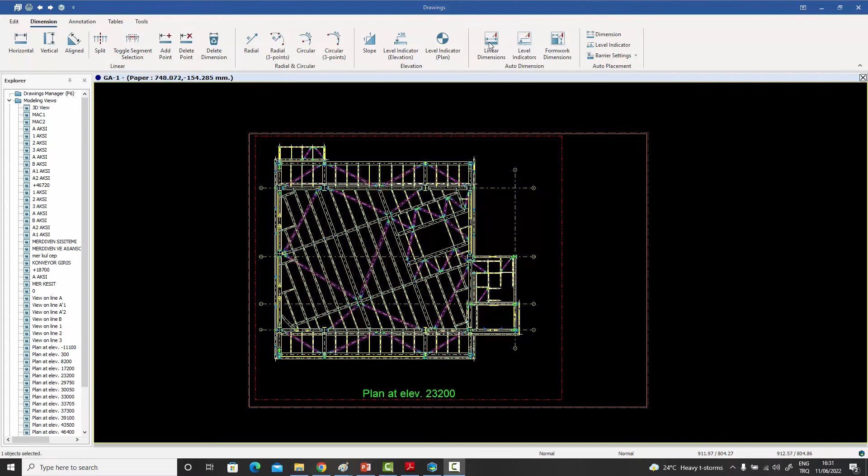This button over here works for both steel GA dimensioning as well as for concrete. All you need to do is first press the shift key and press the button so you can change some of the parameters. Under the general section, you have these two options: creating the steel work GA dimensions or creating the formwork dimensions. You can create both at the same time as well.

If this is selected, and as far as the steel GA arrangement options, you can turn certain things on and off. By default, any inclined members are turned off because that creates clutter more than anything else. So it will do the main dimensioning for elements lying in the XY plane of the drawing. All we need to do is select the viewport and press this button, and your main dimensions, as you can see on screen, will be created for you.

Let's go over here. So all the time you'd waste by selecting and zooming in and selecting the points again and again, that will be done for you.

Now the elements which are not in the plane, like the inclined ones, will not be dimensioned. So those you will need to go in and dimension yourself. So this is a very quick way of doing your steel dimensioning.

Now that we've finished dimensioning your general arrangement drawings, let's move on to annotating the general arrangement drawings. Annotation is a broad topic, and the first thing I want to say is that all different kinds of objects can be annotated. So on the left side under the annotation menu, you have profiles, plates, cuts, joints, bolts, welds, and generic solids. And over here we have the rebars. All these types of objects can be annotated.

By annotation, we basically mean showing any field related to that object on the drawing.

So let's go into the profiles one. You have these little arrows beneath every one of them, and if I click on them, you see there are several options. One is to directly annotate using the current settings, or you can first modify the settings and then use the annotate command. And then there's a barrier settings, which more often than not you will not touch, but I will explain that as well. So if I go into my settings for the annotation of profiles and click on that, this dialog box opens, and this is for profiles.

And if you see on the screen, you've got all these fields to play with. So you can annotate the ID, for example. Let me just put these back in to start from scratch. So you can put your ID, and what you can do is just drag it into this box, drag it back, drag it to the left side, or drag it to the middle or the bottom. But more often than not, you will just drag it into the middle because it's going to find its place anyway. So you can drag the ID if you wanted to annotate the IDs of the elements.

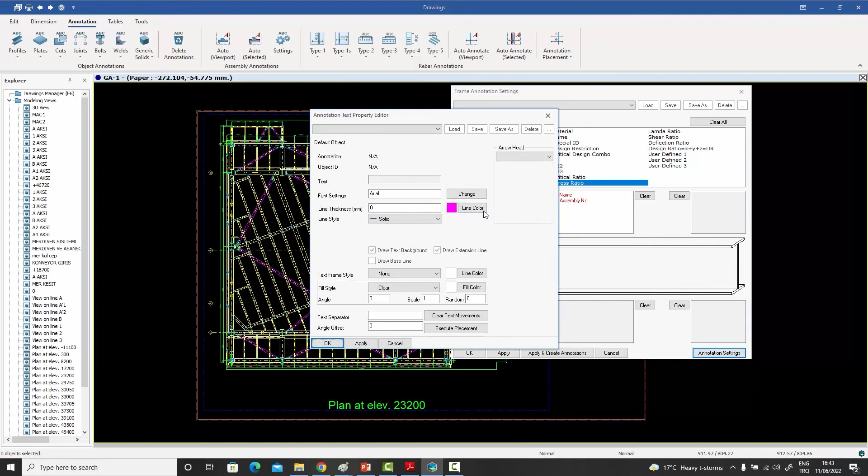Basically, you can access the fields. So in this case, what I'm going to do is put in the profile name and the actual assembly number. Then, if you went into these annotation settings, you have control over the font styles, the size of the fonts, and the colors and so on — you can modify those from there. Let's just keep them whatever the default is right now. Say apply. So currently I've chosen the profile name and the actual assembly number in my settings.

Once I'm okay with the settings, all I need to do is select any member and say, okay, annotate this profile. And when I do that, immediately it annotates the profile section name as well as the actual assembly number.

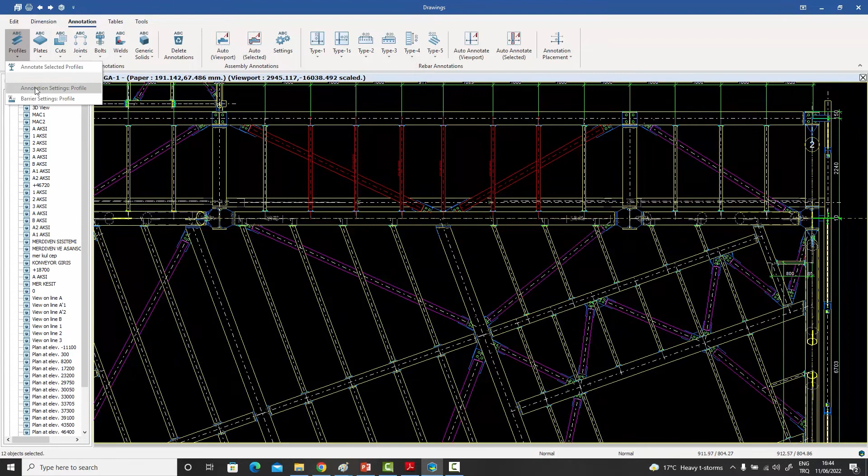I can do that. I can select 3 of them and say annotate all 3, and all 3 will be annotated. I can select a whole group like that and say annotate the selected profiles, and the program will find a place for them.

If they're clashing with each other, it depends on your barrier settings, which we haven't discussed yet. You can define your barriers, which objects you want to behave as barriers and which ones you don't want to behave as barriers. Depending on those, you can very easily create your annotations on the screen.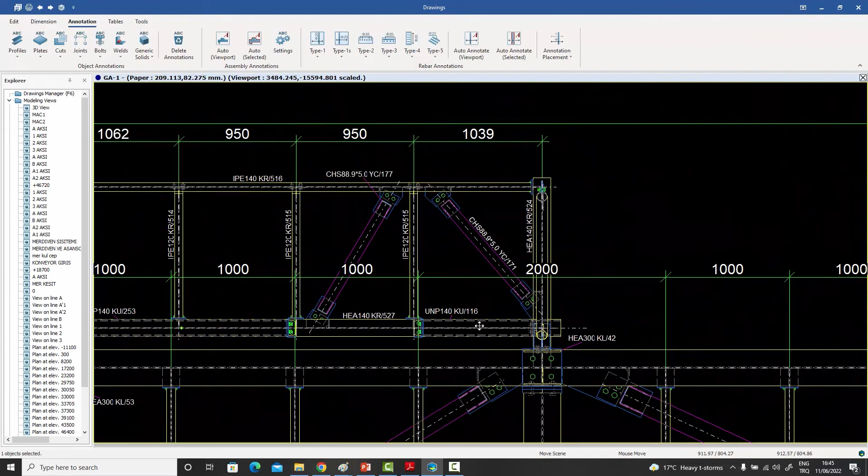There's a faster way to do this as well, which is you just select your viewport and say auto viewport, and that will create the annotations for the entire viewport. If you zoom in, you can see very nice locations have been found. They're not clashing with each other, and there's no overlap. There's no cleaning work to be done.

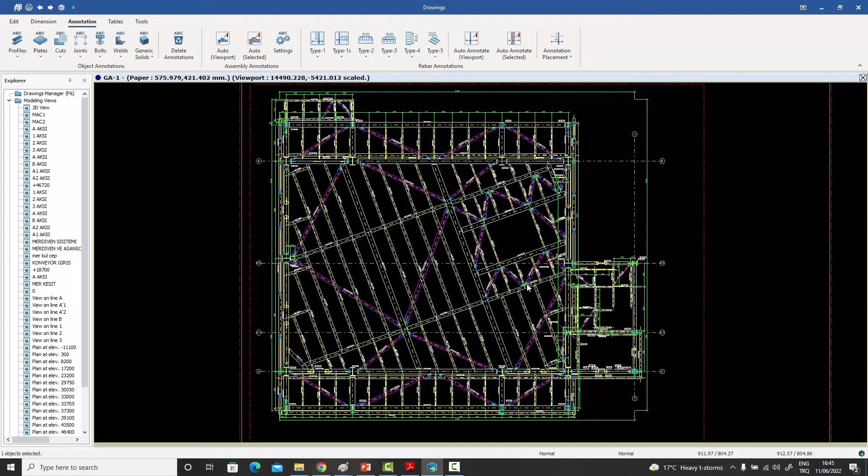Even the very complicated areas have been sorted out pretty neatly. Obviously, this will depend on the scale of your drawing. If you have a very small scale or a very cluttered drawing, you might get a worse looking output. Usually the solution in those cases would be to slightly increase the scale, or maybe decrease the font size of the annotations, and one of them should work depending on the situation.

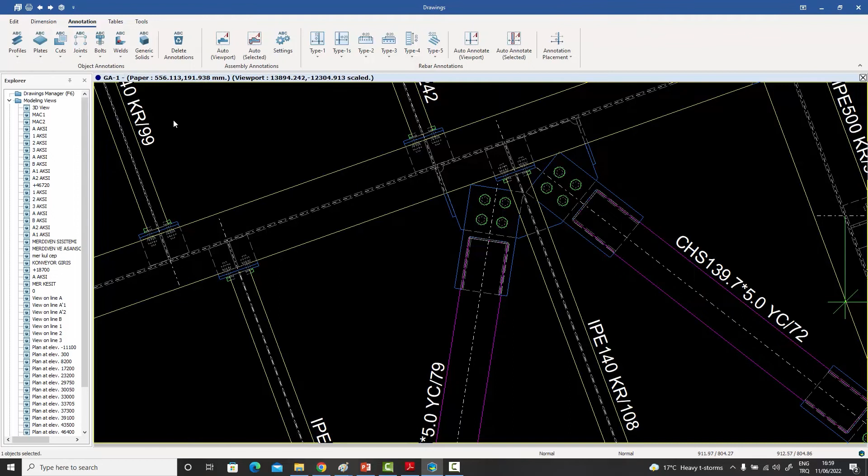For the plates also, we have the settings and the annotation command, and for the rest. So for example, if I select this plate and say create the annotation, I can immediately see whatever field I have chosen inside that will show up.

I can do the same for my bolts, for example. I can go in there and say annotate my bolts, and my bolts will be annotated. I can do that by a multiple selection as well.

Typically people do this in steel GA drawings or other drawings. But there's one thing I want to mention, which is the joints, which is something you don't normally see - that we can actually annotate our joints as well.

If I go into my joint annotation settings, you see that for the joints I have - because Comosys is an integrated program with finite element capabilities as well as detailing capabilities - my maximum displacements in the X direction, Y direction, Z direction, the combos which create those maximum displacements, and the minimum XYZ displacements as well. So I've got lots of analysis related fields as well.

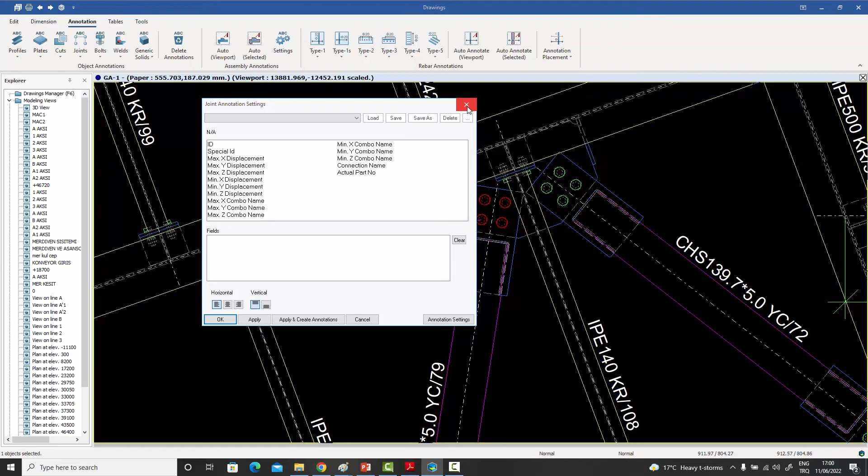Like I mentioned with the frames, I can give my critical combos, my deflection checks, and my stress checks. I can also create a drawing in which I have imported my joints.

Obviously, for that I will have to go into my filtering and go to my filter settings, and in my object types, I will also need to include my joints as well. I need to import them into the drawing, but if I do that, then I can annotate those joints with the fields I just showed.

And this could be a very nice thing, because instead of creating these large reports with hundreds and hundreds of pages where the user needs to keep checking if, say, on some page it says joint number 3442 has a displacement of 3.7 centimeters, and the user needs to go and find where this joint is located...

Instead of that, you can create these A0 drawings, for example, with lots of viewports for all the plans and sections, and all your joints are labeled over there. And directly on there, you can put in your maximum and minimum deflections and the load combinations which are creating those, or the profiles are also shown, and you can show how they're being stressed and which combos are stressing them the most.

So this is a nice way of expressing your analysis related data through your annotation in the drawings. Now, finally, we've gone through creating viewports, creating dimensions, and creating annotations, and this was the major part of creating GA drawings manually. Like I said, this is like 95% of the job.

Obviously, you'll have little things left like importing notes, importing a title block, or maybe inserting some DXF symbols here and there to finalize your drawing. I'll quickly go through those as well. So let's say we wanted to import a title block over here.

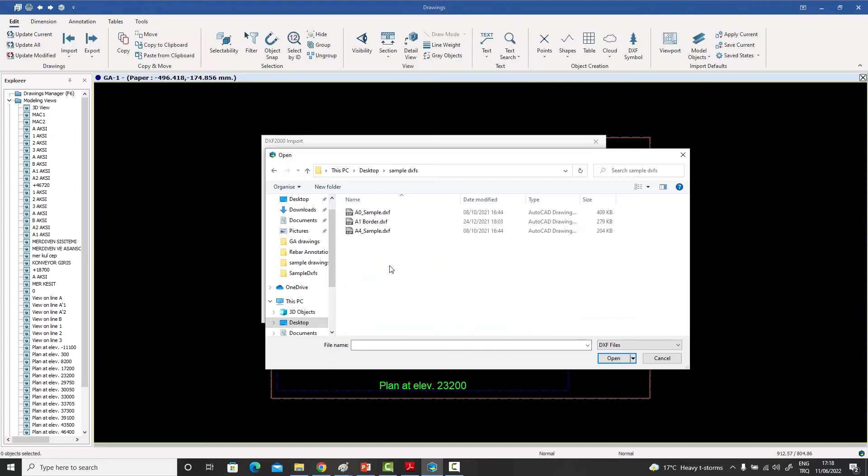You just go to the import section and say import a DXF, and over here it asks for a file name. You can click on this button over here, and I have got a sample stored away. Let's say sample DXF over there, and it's an A0 sample. This is a title block.

When I do that, it imports that into the command, and then it has an option of anchoring. Say you can anchor the bottom right of this imported DXF to the bottom right, or the bottom right of the paper to the bottom right of the imported DXF, because I want the title block to be over here. I can give it certain movements as well if I wanted to, and I can give it a scale as well, but the scale is okay in this case.

So all I need to say is just press import and close this and close this as well, and my title block will be imported into my drawing.

Another requirement which I might have is to insert a few symbols here and there. Some of these symbols might be outside the viewports, and some might be inside the viewports. The intelligent thing about symbols is that if it's outside the viewport, it'll come on a scale of 1 to 1, so whatever DXF symbol you have ready, it'll just be imported on that scale. But if you import it inside a viewport, then the scale of that particular viewport will be taken.

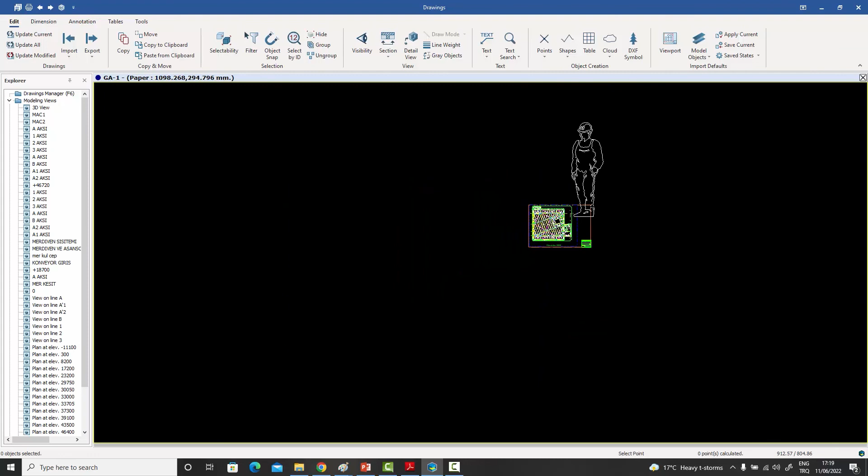So, for example, if I go to this DXF symbol over here and click on any point, there's a human figure inside. This human figure will be drawn over there on a 1:1 scale because it is drawn in actual human size. But if I click on this inside this viewport, then the human figure would take the scale of that viewport. So let me just delete this one.

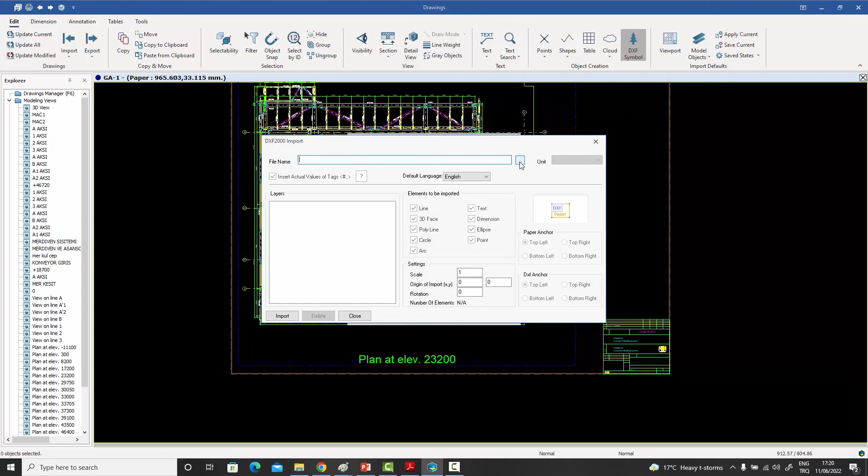So in this way, if you press Shift and press the symbol, you can go and select any DXF and import it into your drawings and insert it wherever you want.

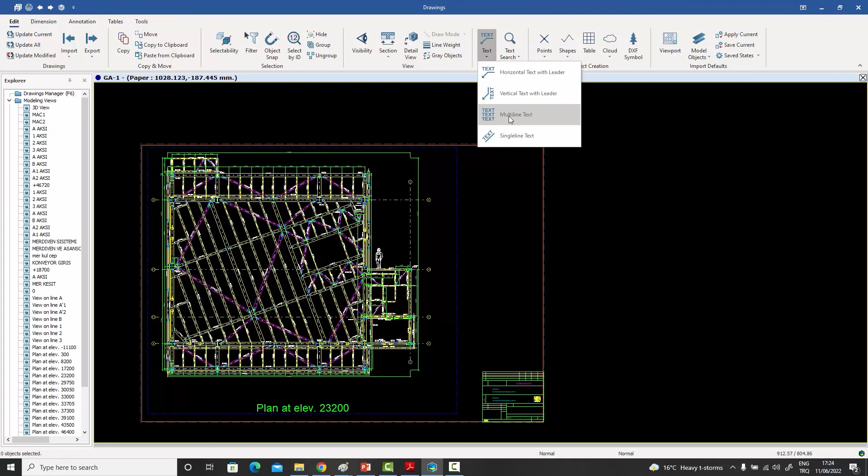Now, similarly, if I wanted to insert some notes from a standard file which I use continuously in my projects, I could have that stored away somewhere on my machine. I can just call the multi-line text command, select a point, select a direction, let's say a horizontal direction, and then double click on that text and press this button over here, and this will allow you to change the text.

You can write directly over there as well, but if you've got some notes stored away, you can go to your desktop and select your general notes, and they will be pulled in. If you say OK, those notes can be placed on the drawing depending on where you want to place them. As long as you've got them ready in your computer somewhere, you can just call as many as you want.

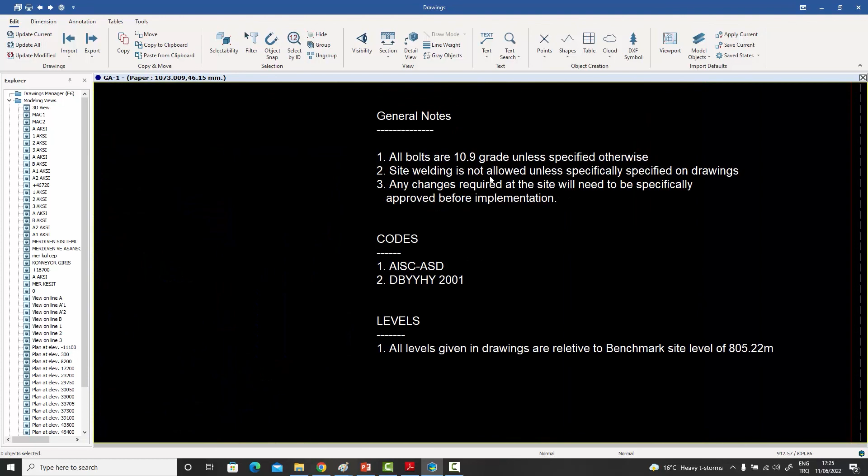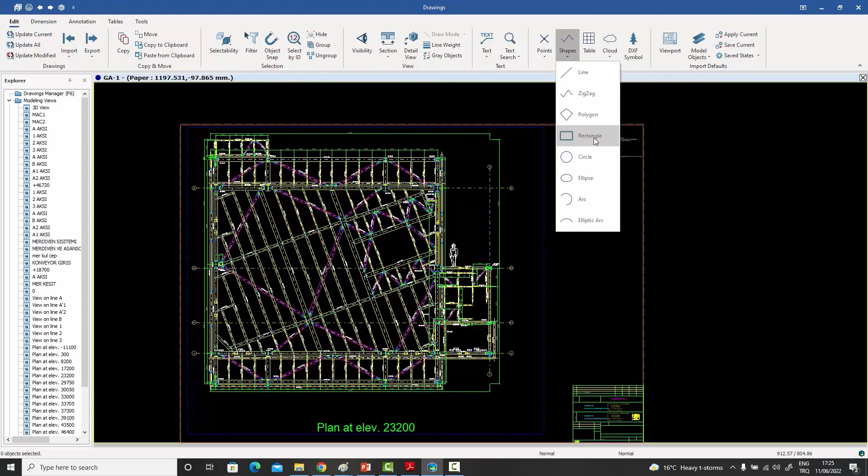You can obviously do these things through the layout manager as well. But what I want to say is that once you're done with the viewports, dimensioning, and annotation, adding the title blocks, adding some notes, adding some shapes, you can draw lines, zigzag lines, polygons, rectangles, circles, and clouds.

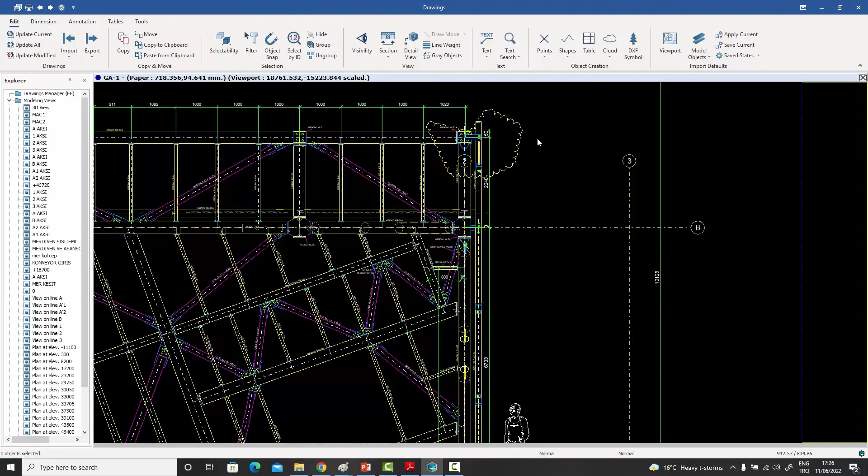So for example, you could zoom in and start drawing clouds around anything if you wanted to, and those kinds of things are very easy to do. But the most time consuming parts are the first three: the creation of viewports, the creation of dimensions, and the creation of annotations. And those, as you saw, were actually not that difficult.